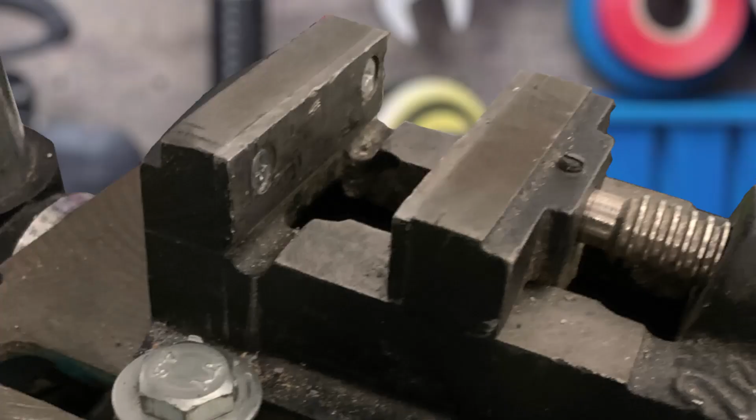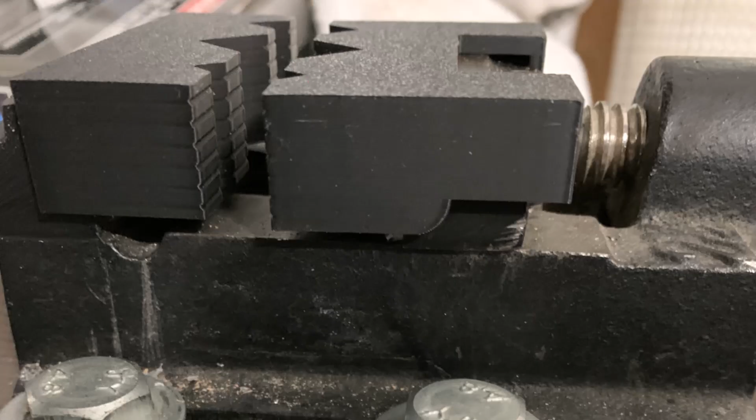If you have a vise and ever wanted to hold a cylindrical part vertically, you've noticed it can be difficult to keep the part vertical. If you push too much, the part may also move during drilling. The goal of this video is to create tailor-made jaws to hold a cylindrical part safely and exactly vertical.

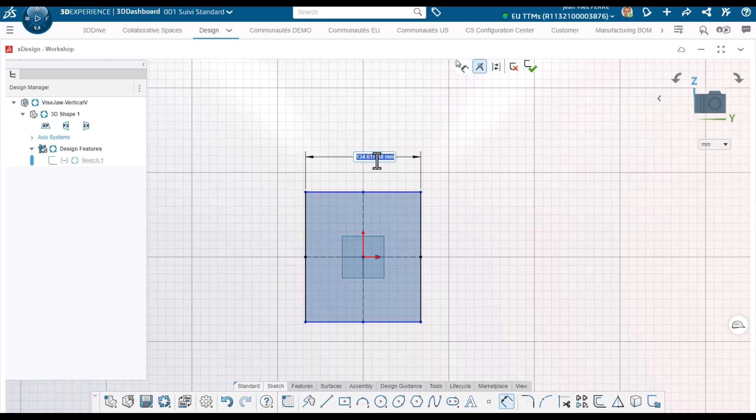I start by creating a new part and giving it a name in my collaborative space. I select a plane and start a sketch, and based on vise dimensions, I create the overall shape of the first jaw. I create a box with dimensions and show how to enter a mathematical operation directly in the dimension, here adding the width plus 2 times the thickness I want to add. This is a simple sum, but it could be much more complex. I extrude mid-plane in case I need symmetry later, and the first block is done.

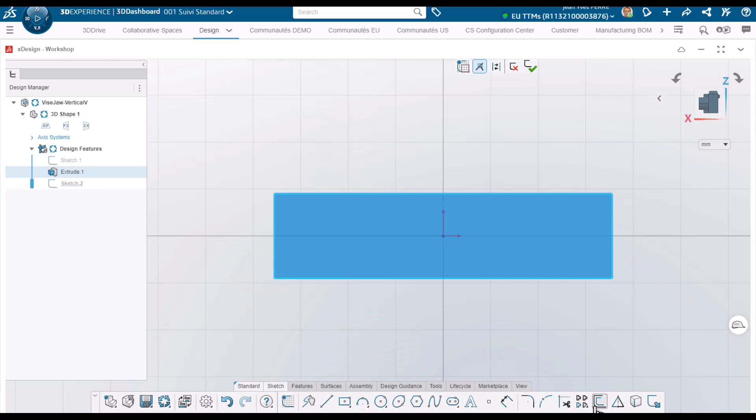Then I create a cavity to host the vise jaw. For that, I create a sketch on the side with an offset of the outer lines. To keep the offset, I turn the bottom line into a construction line and add 2 vertical lines. Here is the first mistake - see the blue line on the bottom right. This means the line is not defined enough and could move if I change a dimension. I didn't notice that and continued with the cut based on vise dimensions.

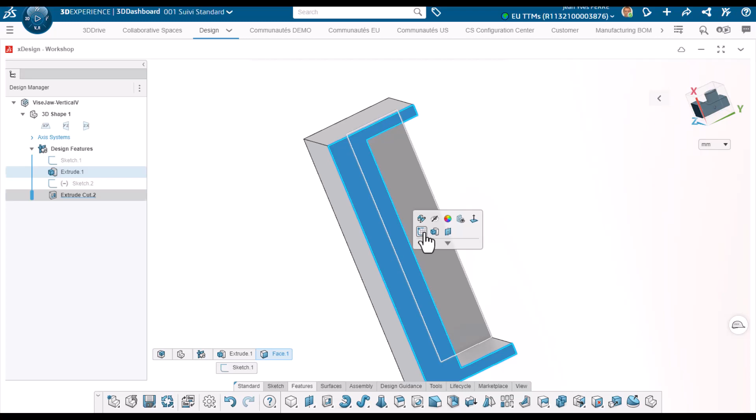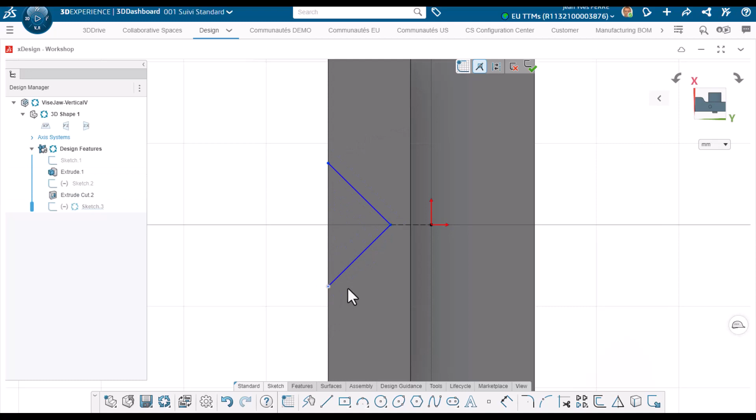It looks nice, so now I can focus on shapes that will hold my cylinder vertically. For that I use a V-shape cut, as is commonly used in the industry. I place the lines and add relationships to force them perpendicular and oriented at 45 degrees. I add a reference line to define the V-shape in the middle with a dimension. I need more material to keep the part strong enough, so I reduce the cut depth, and finish my sketch with a line. The cut is made and looks good.

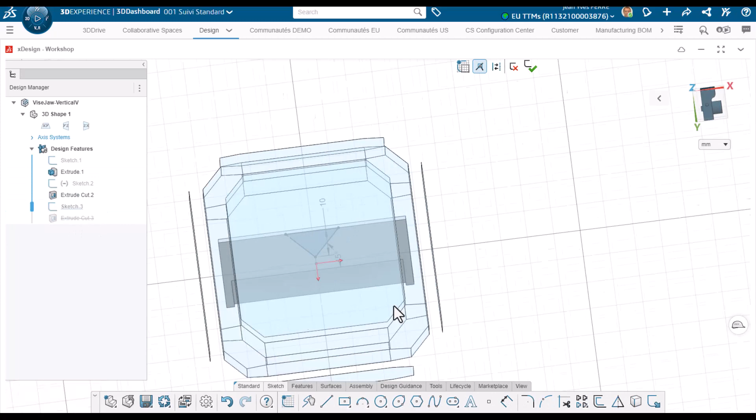But what if the part I need to hold is smaller than this cut, and the jaws lock before they press the part? To solve that, I create smaller cuts with the same rules next to the big one - a medium-sized cut and a small one. This should be enough for most of the cylinders I need to hold in this vise. Of course, I add perpendicular relations and angles, but also dimensions between the cuts to be sure they don't move if dimensions change. It also helps solve problems like this one - with fewer degrees of freedom, the solution is easier for xDesign to find.

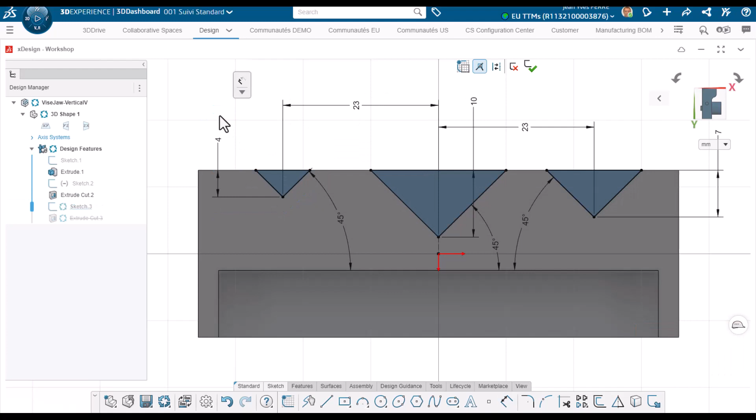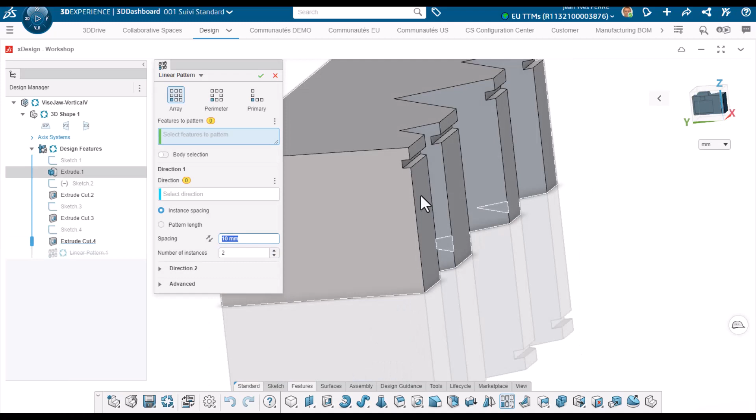Now I would like to add some grip on the flat sides in case I want to press something there with maximum security. For that I create rectangle shapes with dimensions, including dimensions with the rest of the part. Then I pattern them across the height, and with a quick math I choose to pattern with the full length and the number of instances. Then I try another width for the rectangles, but I still don't like it.

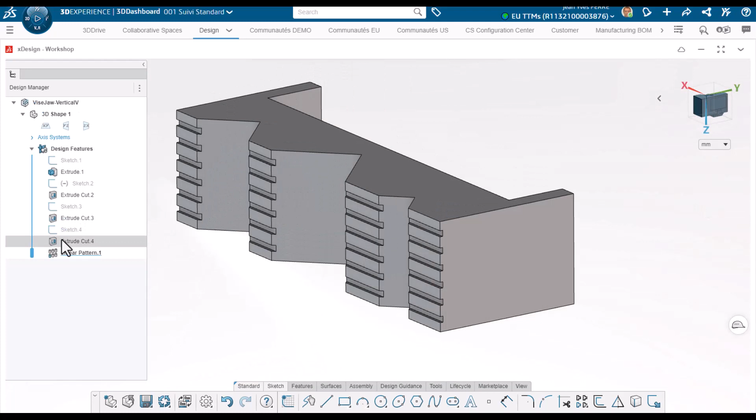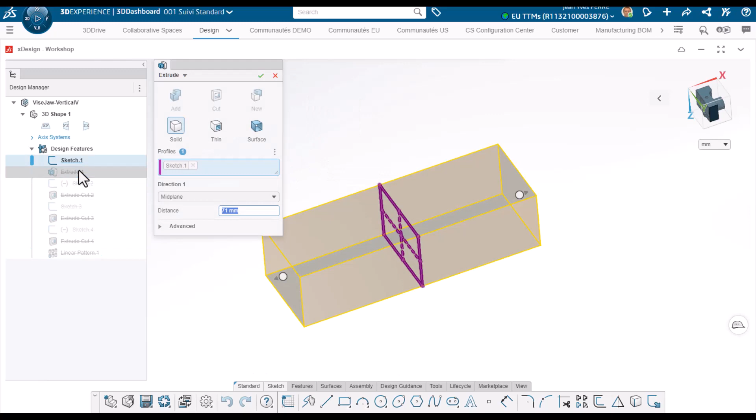So I change the rectangles for triangles. But see again how I keep blue geometry which is not defined enough - is it a good idea? We'll see quickly why it is not. Just to check, I measure the inside cut but realize clearance may be too small, so I decide to increase the overall length of the part. This is where my previous mistake creates an issue - I don't notice it, but the line didn't stay vertical, so the sides are not fully vertical anymore. And I print the part like that.

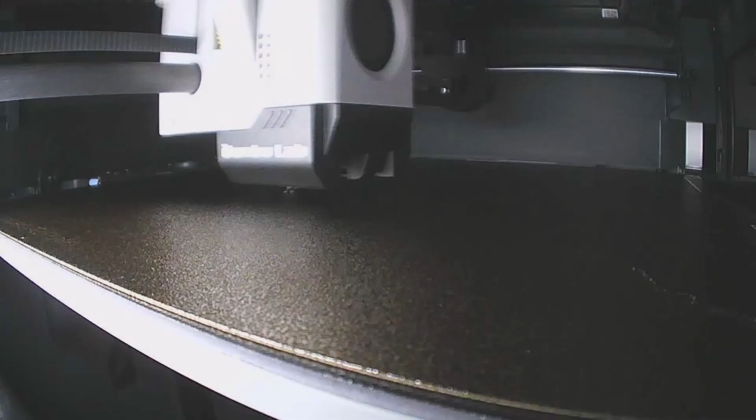To do that, I choose the bottom face of the part and export to STL, ready for the 3D printer slicer. After that, I use the STL file with the 3D printer slicer, and this is printing time.

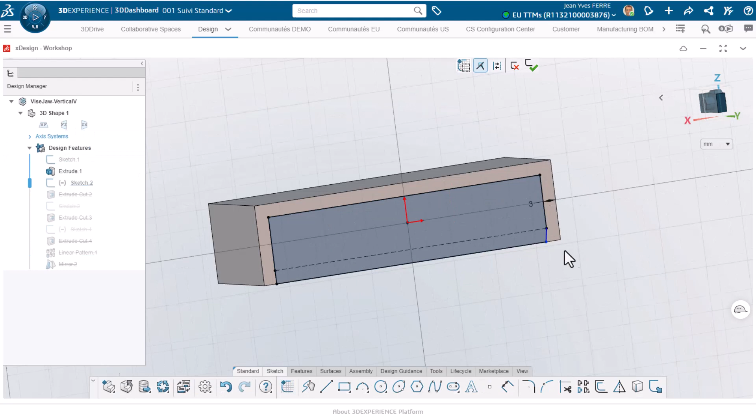The first jaw is done, so I need to create the mirror part. This is simple. At the same time, I realize my first mistake on the real part, so I go back to the right sketch and add the relationship I forgot. It's important to look at your model and check all the warnings xDesign displays to prevent mistakes - I wasn't careful enough, all the signs were there.

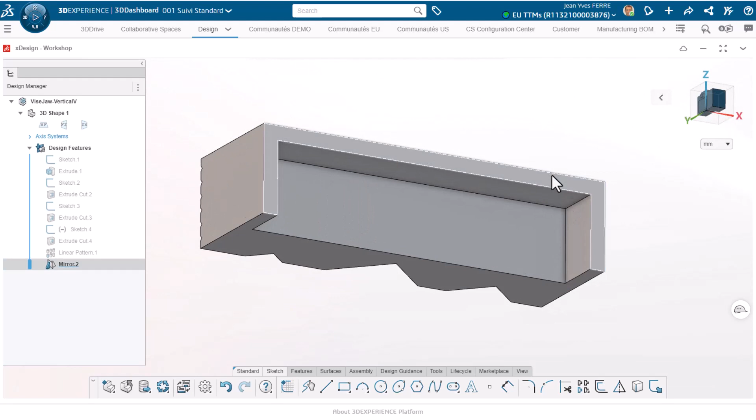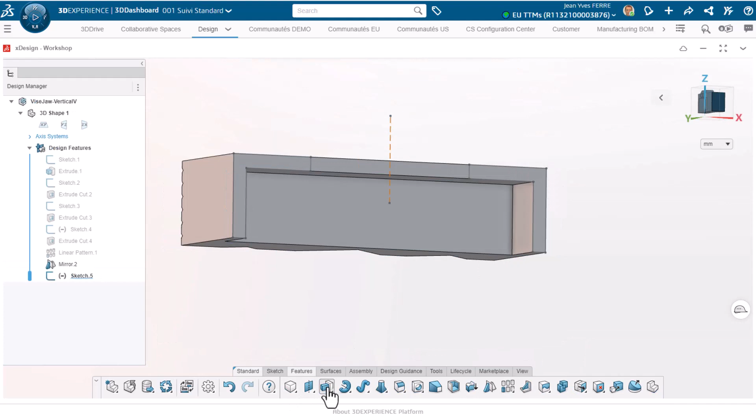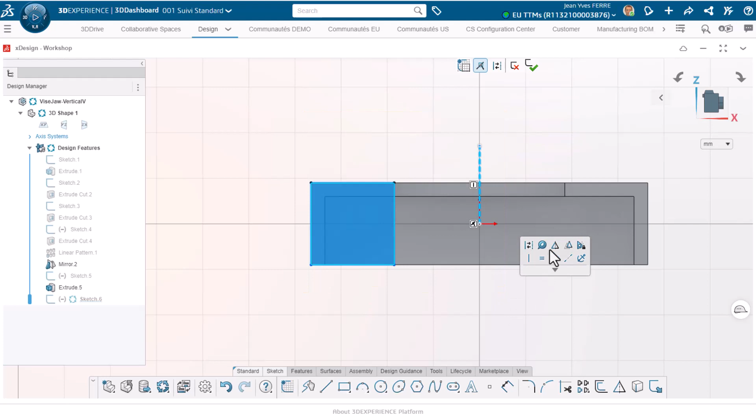Now I can increase the size of the part again and probably sand the previous jaw to remove wrong material. This new jaw will live on the other side of the vise, so I decided to add tabs to improve stability. To do that, I reuse geometry on a portion of the part to extend across the vise. The existing jaws had a symmetry for the cut, so I only had one dimension for both sides. With an extrusion, I get the first part and the extensions. Then I add the returning tab, adding some relationships with extensions. But again I didn't pay enough attention to the bottom line here that stays blue, so it is not linked to the extension - a new mistake I will catch very quickly, but this time before 3D printing.

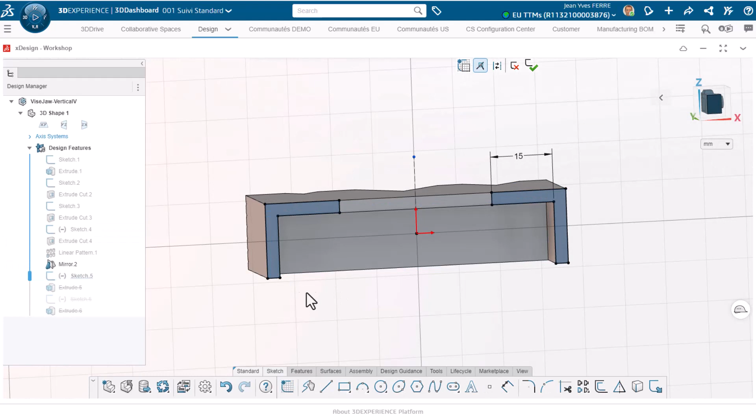I create one side, then mirror it - I don't forget to select the sketch, so extrusion creates both tabs at the same time. Once I create the tabs, I realize they are too long, so this jaw couldn't fit, so I reduce their height by changing the extrusion sketch. Of course, they are not linked, so they don't follow, and I need to add this relationship to the sketch. Now it will correctly follow any further change.

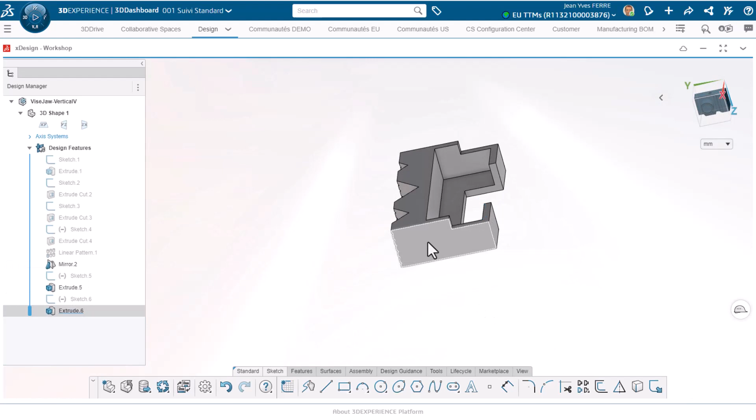I finish with a cosmetic fillet, and again create an STL to send to the 3D printer. Once processed in the slicer, it is again printing time.

Assembly is more than easy - just put the jaws in place, and then you can safely drill a hole in a wooden dowel. Of course it could be much more accurate with a vise properly fixed to the drilling machine, but for this example it did the trick.

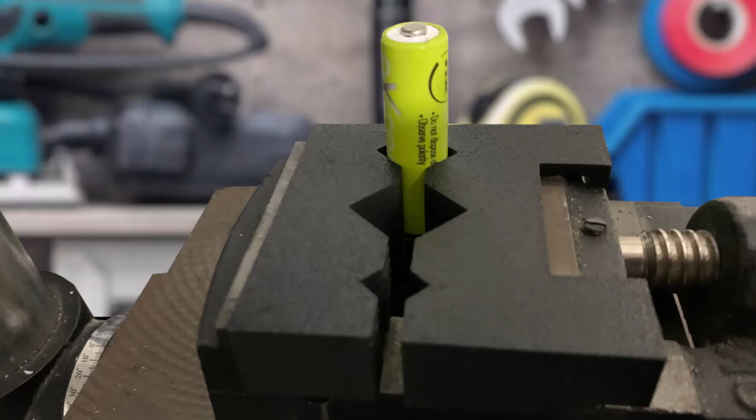If I need to hold a bigger cylinder, I can use one of the other cuts. Remember to keep your sketches fully defined so they will be strong enough to support a lot of changes - no blue, only black sketches, this is the rule.